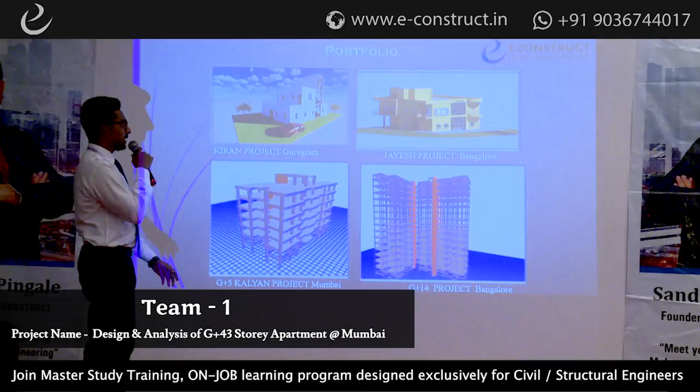We had done some of the projects, as you can see. These are some of the projects done by my team members. There are a couple of structural projects and a couple of residential projects, where you get to see a lot of contemporary things. This is a residential-cum-office building, and this is a yoga center with a residential house. So my team members have worked on various contemporary projects, which gives me immense pleasure to present in front of you.

So coming to the project now. The project that has been given to us is a high-rise project. This is in Bombay, and the clients are Airtel Developers, located in Elias Road, Mumbai. Firstly, as a project manager, I had to sit with the clients and the architects to grab the basic data, which you can see on the slide. We were asked to make G+43, where the client wanted 2 BHK and 3 BHK units.

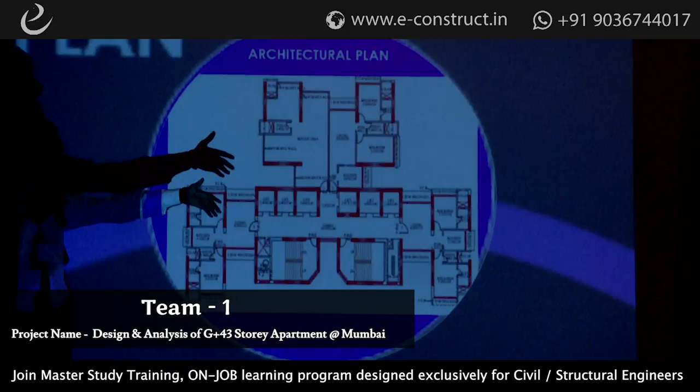So all these disciplines, I'll just state them. The primary thing is the architectural plan. From the architectural plan, you can derive the architectural model. This is the plan, and from that we have come to the model; we have basically used Revit software for this. This is the design model done by our structural team using ETABS, and this is one more elevation model of MEP, which is the other discipline.

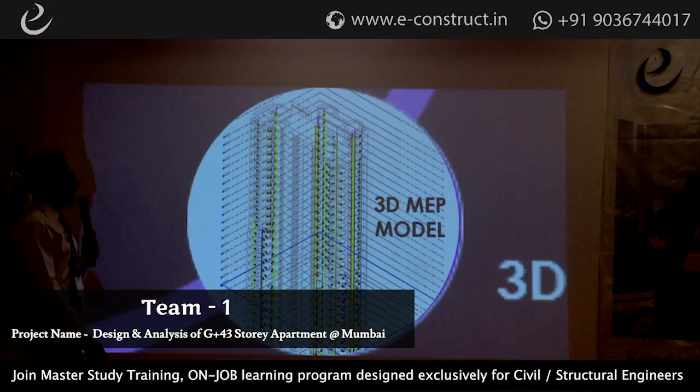For general people who don't know, MEP is mechanical, electrical, plumbing, in which you can collaborate and merge all the elements. If we go in depth of that elevation, you can see two of the typical plans derived from Revit. One is for the plumbing, where you can visualize the plumbing fixtures, like a spout; the blue line is cold water, the red line is hot water, and the green ones are sanitation pipes.

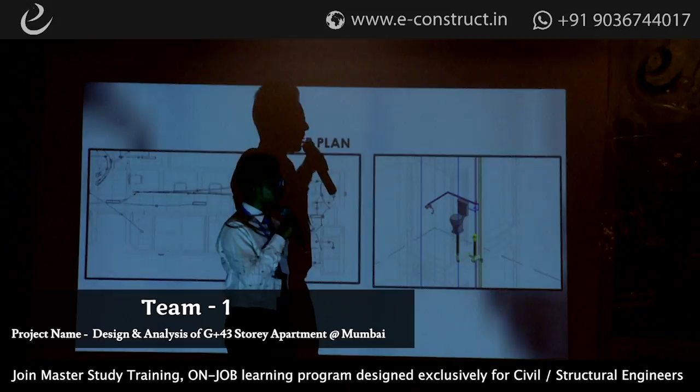So this is how you can virtually see where your lines are going, where your fixtures are placed, and at what height. This will avoid discrepancies for skilled laborers. Let's say a plumber is working and wants to place a pipe, and there isn't a core cutting hole for him to take the pipe out. In such cases, these things can be resolved by pre-planning in Revit.

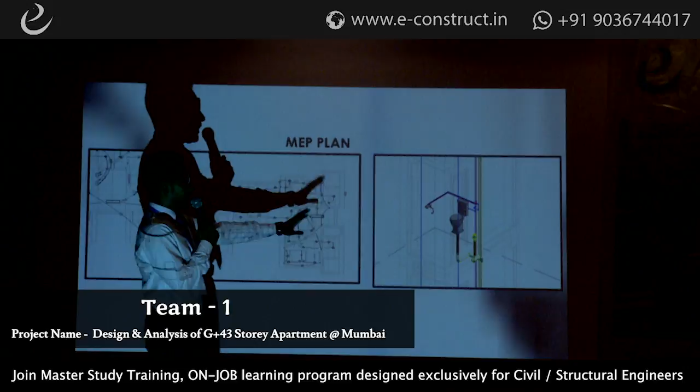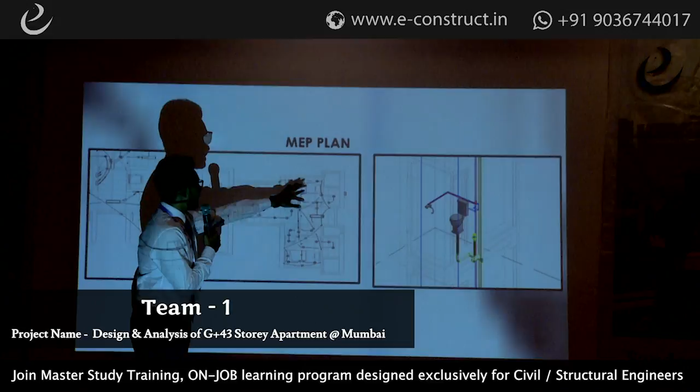And this one is an electrical drawing of a typical house. This is a 3 BHK flat where you can see all the connections and the panels that we have connected. These are the tube lights for the kitchen, and these are normal false ceiling fixtures. This is one typical electrical plan. Similarly, we can do a lot of things in Revit for BIM technology.

One more thing we can do is scheduling. When you go to the execution stage, it becomes a problem for site engineers or quantity surveyors, and there is a lot of time drain and energy loss. BIM will do it for you by making the schedules and quantity takeoffs.

And this is Navisworks, which can be used for clash detection and timeliner. It will virtually show us where the clashes are when you club different disciplines, and you can see the clashes we have resolved, and formulate them with proper documentation in Navisworks, which is again BIM technology. Once they are done, you can also do a timeliner in Navisworks, which gives you a clear picture of how and on what date things will go.

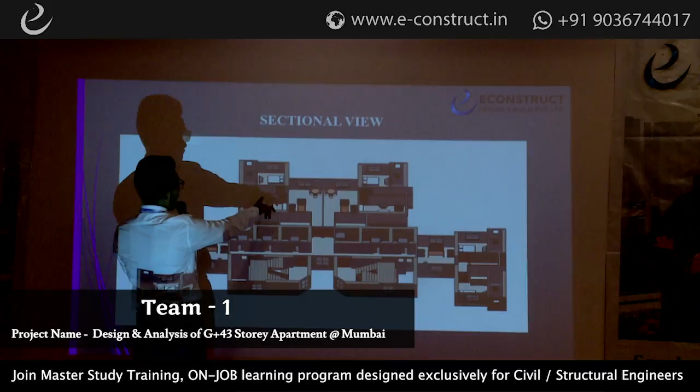So these are the things that you can do. So coming to the project, using all these resources, we have done the model, and you can see this is a typical floor plan where we have cut the section, and the top ones that you are seeing are 2 BHKs, and the center portion that you can see is the staircase, and there are lifts. You might think why there are so many lifts for just 4 units of houses.

Since this is a G+43 and occupancy is more, we have made the calculations and come to a conclusion that we would need 6 lifts, so that it will lessen the discrepancies and disputes of the inhabitants or the end user. And this is a typical floor which has 4 2 BHK units. So this is how you can formulate and document all the quantities using Revit. And the final data I'll be giving you at the end of the presentation.

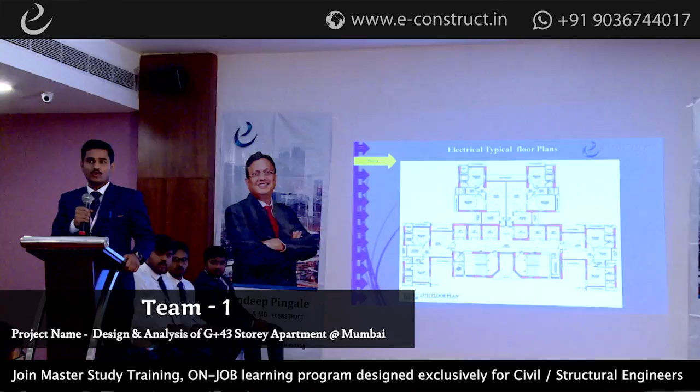My work starts from drafting the center line plan. Then we draft the structural framing plan, then the superimposed plan with help from our ETABS modeler, Mr. Hemant Bagre. After that, we draft 2D plumbing and 2D electrical drawings with assistance from our BIM modeler, Anil Prakash. After completing all the analysis and design, we started the AutoCAD detailing with assistance from our senior structural engineer, Nitin Sabu.

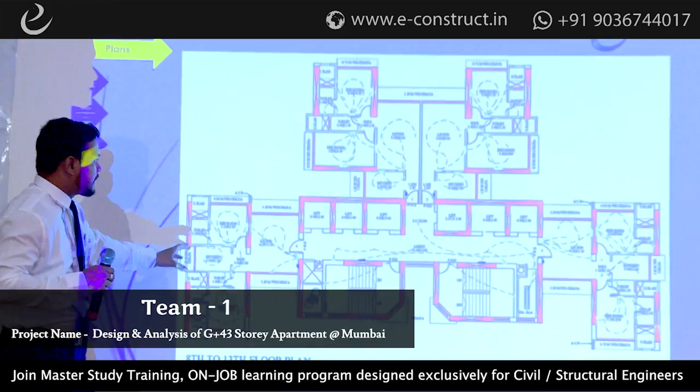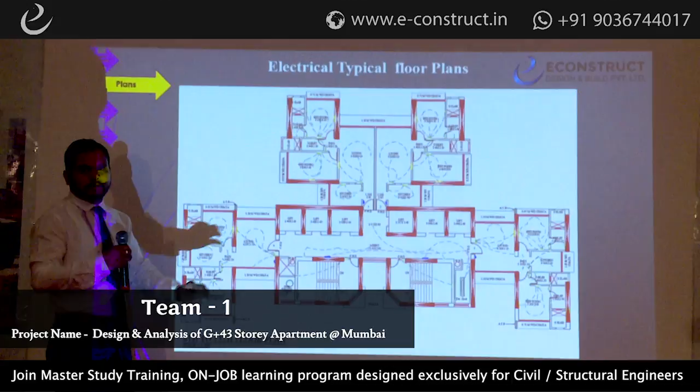Now I will be explaining about the electrical typical plan. So we have almost 3 typical plans. This is our 2 BHK and this is our 2 BHK. So we have given one switchboard in every room, and if MCB is there in every apartment, we will be getting one MCB, and in the main hall or a lobby part, we will be getting an MCB for all the connections for the heavy appliances.

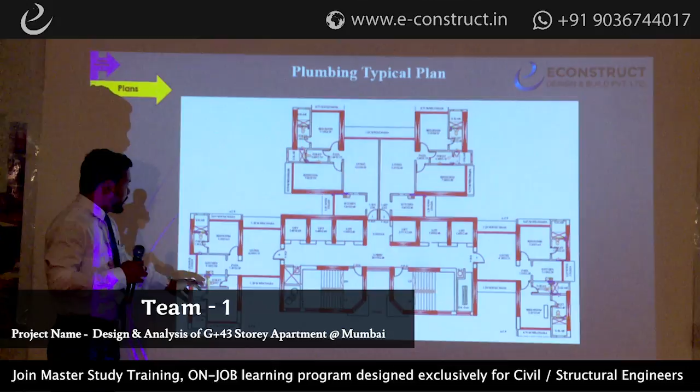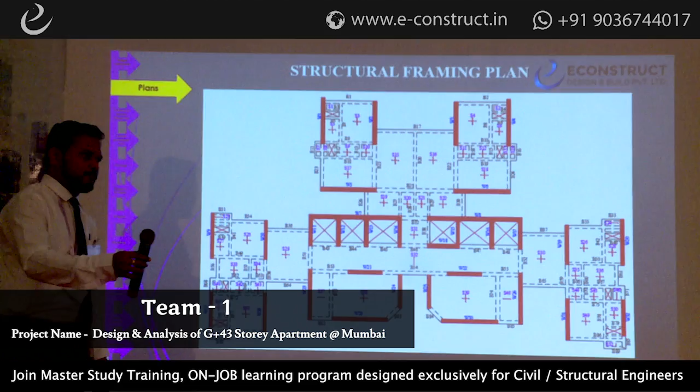As I am an ETABS modeler in this Elite project, I would like to explain about the structural framing plans, superimposed plan, mathematical models and the beam releases given in this project. As per instruction given by our structural team and by reference of the architecture drawing, we have prepared this structural framing plan. If you see carefully in this structural framing plan, the discontinuous line shows the placing and the positions of the beam.

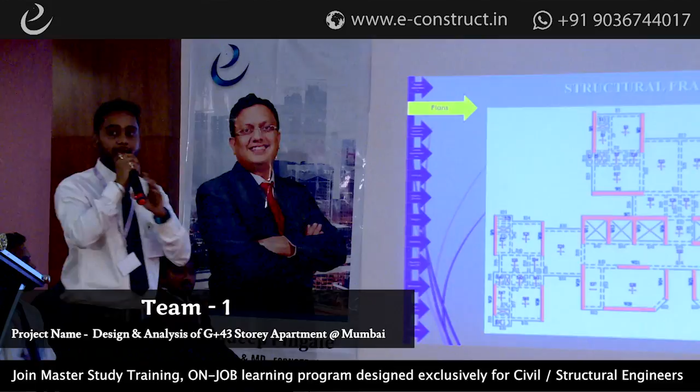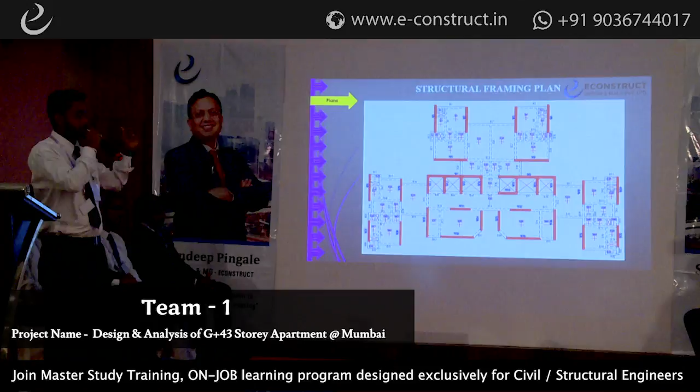As an ETABS modeler, we are focused on the placement, and the offsets coming from the beams in the room by the priorities. We are trying to adjust all these offsets inside the room considering the priorities. For maintaining aesthetic views, we are keeping all these beams inside the wall. As we are considering 4.5 inches wall, obviously offsets are coming. So when we merge the architecture and structure plans, a new plan comes up, that is the superimposed plan.

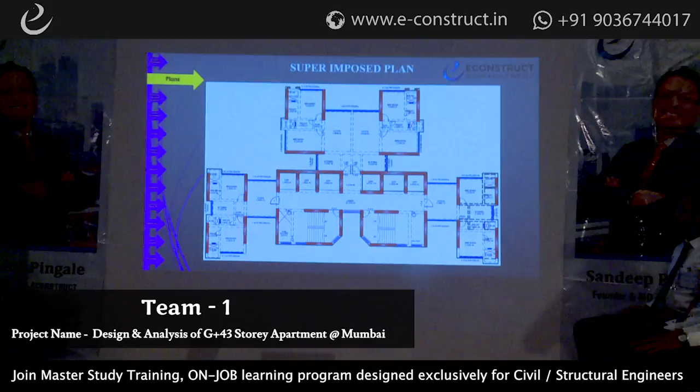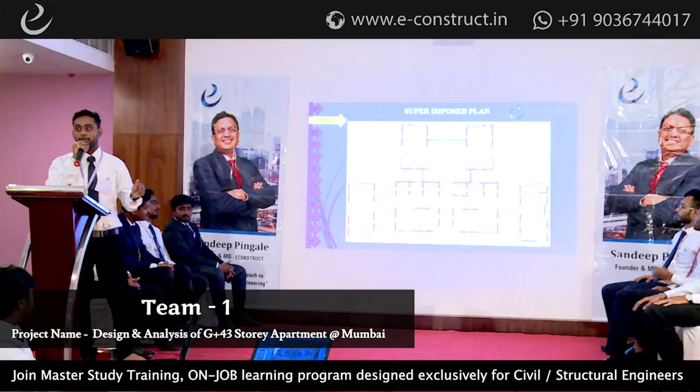Next slide. The superimposed plans give us a clear idea about the position of the beams with respect to the shear walls. In this superimposed plan, you can easily see all the placement and the position of the beams, and I'm sure that there is no offset inside this particular plan. After that, we have prepared the center line plan with the help of beam center lines. These center line plans help to prepare the 3D models in ETABS. After importing into ETABS, we prepared the entire 3D model.

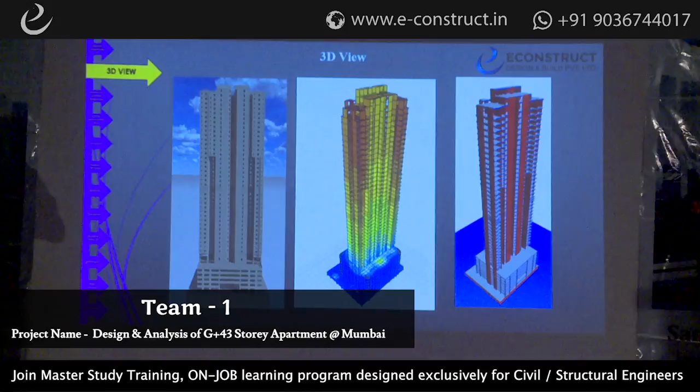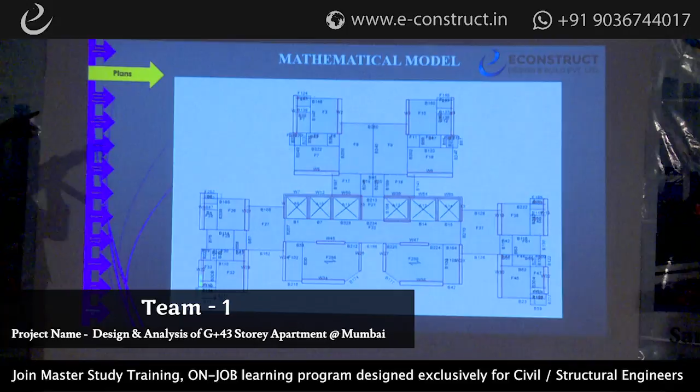We made sure that every element of this entire structure is connected properly to each other. This is the 3D view of our structure and the model. Next slide. This is the mathematical model of the entire structure. The blue lines show the beams, this is the shear walls, and these are the beam releases given by us as per the instructions of our structural team.

After that, we assigned the nominal sizes of the beams and the shear walls in this project. We are taking rebar of HYSD 415 and HYSD 500. The grade of concrete is M35 and M40. As this project is located near Mumbai, there is no issue for the grade of concrete, and we use lightweight blocks for the non-structural walls. The section properties we have considered are beam sizes of 300 mm by 600 mm of M35 grade of concrete, 230 by 500 of M35, and 150 by 300 of M35.

These beams are used for the service slab, and we are considering columns of 500 mm by 500 mm of M40 grade of concrete. After that, we assigned the wall sections: two shear wall sections, 300 mm thick and 500 mm thick, of M40 grade of concrete. We assigned the various slabs like general, parking, staircase, OHT and LMR. We have assigned 150 mm thick M35 slabs, and the remaining slabs are 200 mm thick of M35 grade of concrete. We also assigned all the area loads, considering the various area loads.

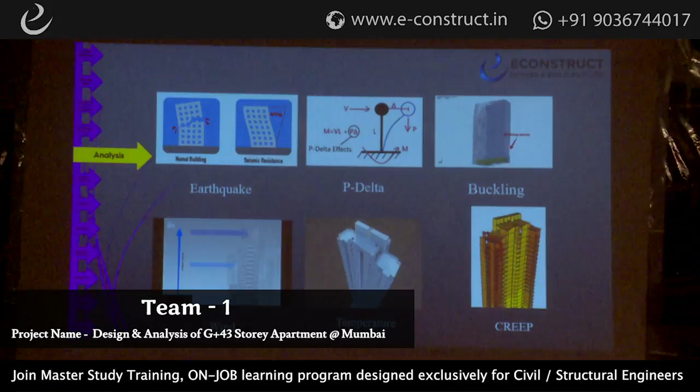In P-delta analysis, why have we done that? Because of the self weight of the building, as it is G+43, its self weight will be huge, and due to that and the lateral force which will be coming, there will be an extra bending moment which will try to fail the building. It should not happen, so we have taken care of that by P-delta analysis.

And due to the self weight of the building, there are compression forces coming on the columns and shear walls. So the columns and shear walls should not fail. That is why we have done the buckling analysis.

And in wind analysis, as it is a G+43 structure, the wind will be governing at the top of the building. So it should not fail in stability checks. Means due to wind, the stability of the building should not fail. So we have done the wind analysis.

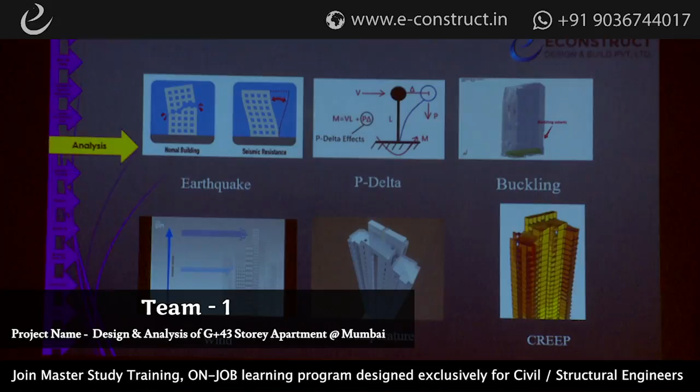In temperature analysis, due to the temperature, there will be extra stresses on the building, majorly on the terrace and the outermost elements of the building. And due to those stresses, the members should not fail. That is why we have done the temperature analysis. And in creep analysis, we have checked that if there is a load for a maximum number of years, like in the lifespan of the building, our building should sustain that deflection. So we have done the creep analysis.

So this is the seismic base shear analysis, which is earthquake analysis. Base shear means the lateral force coming at the base of the building due to earthquake. We have calculated the static base shear, which is VB, and it is calculated by Ah into W. Ah is the horizontal acceleration and W is the self weight of the building. Horizontal acceleration is calculated by Z/2 into Sa/g into I/R, and Z is the seismic zone.

As our building is located in Mumbai, we have taken zone 3 and zone factor as 0.16. As in our building the population is more than 200, we have taken importance factor as 1.2, and we have taken response factor as 4 because we have designed the shear wall as ductile shear wall and RC frames as ordinary frames. And at site, near our basement substructure, there was hard rock, so we have taken site type as 1.

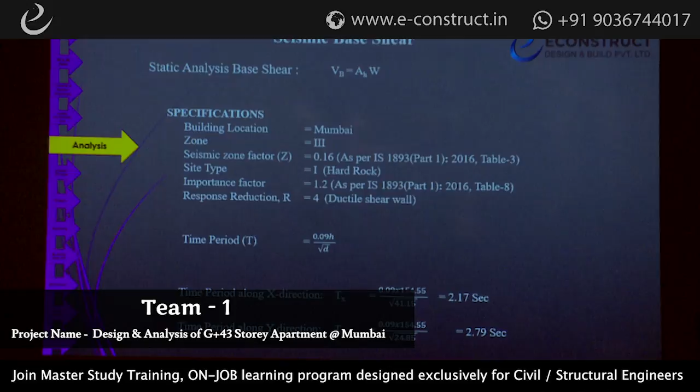As per IS 1893 Part 1 2016, the time period we have taken is 0.09H upon root D because infill walls are present in our structure. Here H is the total height of the building and D is the lateral dimension in x and y direction at plinth level. So time period in x direction is 2.17 seconds and time period in y direction is 2.79 seconds.

We have scaled it, and we have cracked the model in service and strength, as we are considering that in the lifespan of the building, the concrete will be effective only some percent, it will not act fully. So we have cracked it, and we have scaled the dynamic base shear to static base shear.

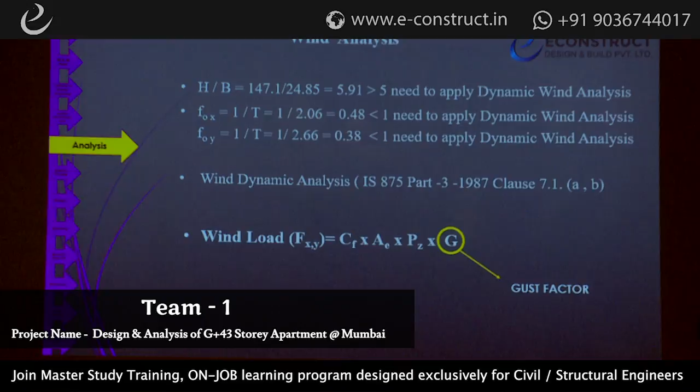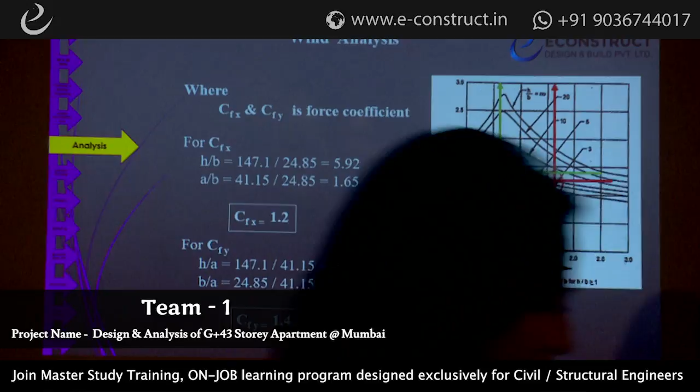In this, the force coefficient in x and y direction depends on the h by b ratio. H is the height from plinth level to the top terrace level, and h by b is 5.92. B is the least lateral dimension of the building, and a by b is 1.65, and the force coefficient is 1.2, and for CFy it is 1.4. Next.

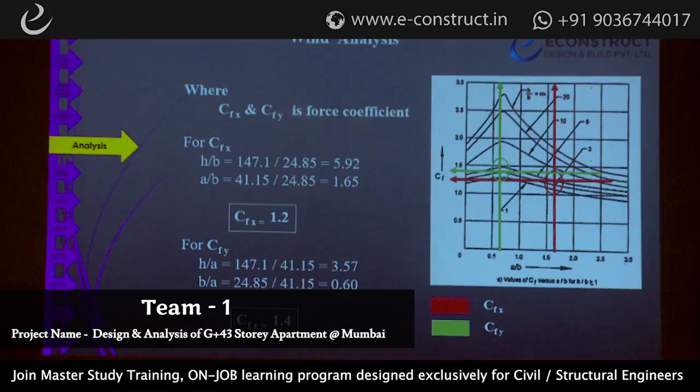Effective frontal area is the area in which the force will be half of the above story and half of the below story. So we have calculated for all the stories, and we have found that the critical one is for the top stories. So in x direction and y direction it is 101.26 and 167.69 square meters.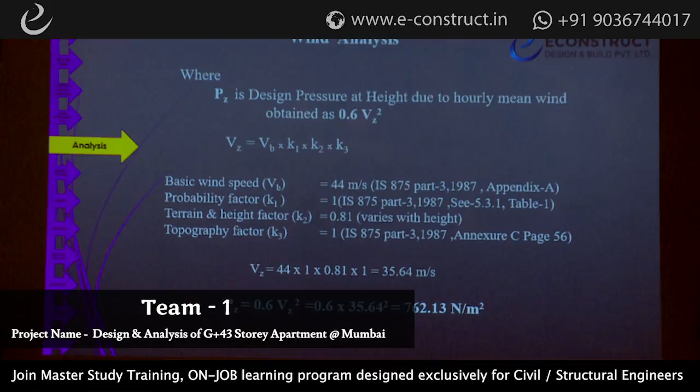Pz is the design pressure at any height, and we can calculate it by 0.6 Vz square. Vz is the design wind speed, which will act due to Vb, K1, K2 and K3, that is basic wind speed, probability factor, terrain and height factor, and topography factor. So we have got the design pressure as 762.13 newton per meter square.

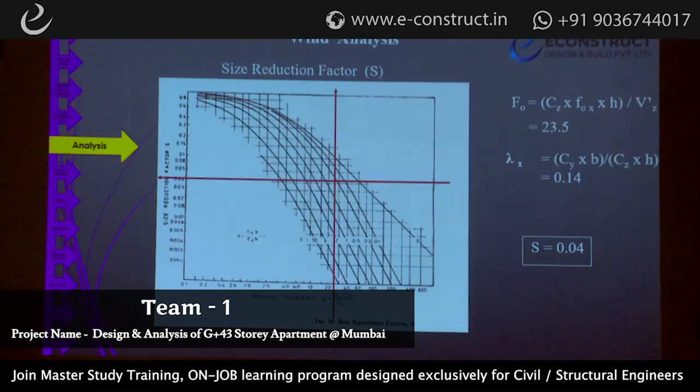Next, G is the gust factor. We have calculated it from the graph, that is GFR and L(h) value. We have got that. Next, background factor, we have got it from this graph by calculating that formula. Next, size reduction factor, we have got 0.04 by calculating that lambda x formula from this graph. Next, gust energy factor, we have got 0.06 by calculating that formula from the graph.

This is the gust factor. We have got 1.95. And wind load in x and y direction is 180.59 and 375.74. As I have told you, we have got this critical one at the top story. And wind base shear is 13,020 kilonewton, and in y direction it is 6,216.33 kilonewton.

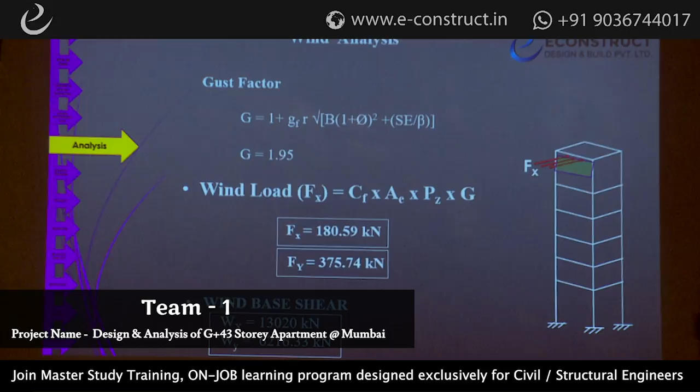Next, modal participating mass ratio will be explained by Sairam Mudumba. I would like to call him. Thank you.

Thank you, Urmit. I would like to give a brief review about my project. First of all, when we took this project into our hands, we analyzed what resources we have, how we can divide the team, and how we can work efficiently. Then we divided the team into some departments: AutoCAD, structural and structural assisting team, the site location team, and all those things. After all these explanations and ETABS modeling and stability checks, now we have to analyze the model. After analysis, we will get some results, so we are going to look into those results right now.

First of all, we have to check the modal mass participation. We have to know what modal mass participation is. We all have smartphones, right? Say yes or no? Yes. We all have smartphones. There is a snapshot option. If we click the capture button continuously, every snap will capture for certain seconds, right?

So if someone is throwing a ball like this, and we hold the phone like this and hold the capture button, the phone will record every movement of the person. So you can see how he is rotating, how he is throwing the ball every second. So that is the modal mass participation in our structural case. We are going to see the model, how it is behaving while a seismic earthquake event is happening.

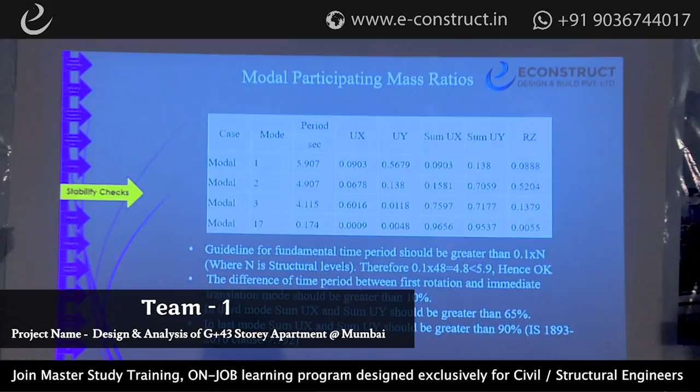So those are the modes we have considered, total 17 modes according to the damping ratio, and those are the time periods and the rotation values. You can check all the values on the table, and guidelines for the modal mass participation. For everything we need a reference, right? What we are doing, why we are doing that. So we have to go through the reference.

So those are the references we took from the Indian Standard Codes. The Indian Standard Codes say that in the previous code there is one thumb rule: the first mode time period should be 0.1 into n. N is nothing but the number of structural levels, how high our building is. So according to that, the first mode time period should happen.

First of all, what is the time period? Time period is the period taken by the structure to complete one first oscillation. So that is the first mode time period, and that should be under control. In our case, according to the thumb rule, it has to be 4.8, but in our case it is 5.9. A little higher means our structure is a little flexible, so we can say that it is safe. Why? Because the structure should be ductile. It has to participate when an earthquake is coming.

Can I generalize this? I can generalize this with one example. If you have a dog with a tight belt and you are holding it tightly in your hand, the dog is trying to move forward with maximum energy. Here we can observe two cases. You are holding the belt very tightly, but your dog is moving forward with high energy. What will happen? The dog will die with that belt, right? In the second case, you are holding it very loose. It will escape from you. Everything is damaged for us, right?

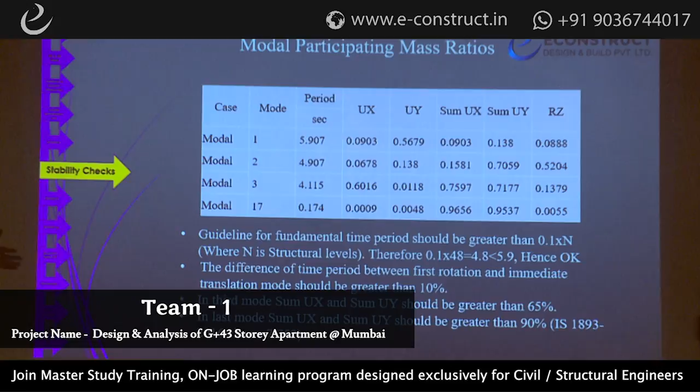What are interstory drifts? According to IS standard, it has to be 0.004 in both directions. It is safe. And coming to the displacement, which we just discussed. Due to the lateral forces, the building is going to displace with a certain time period. We can relate this to modal mass participation. So displacement is under control, so our building is safe. We are providing correct ductility to our building. We can conclude from here and relate this to the modal mass participation again.

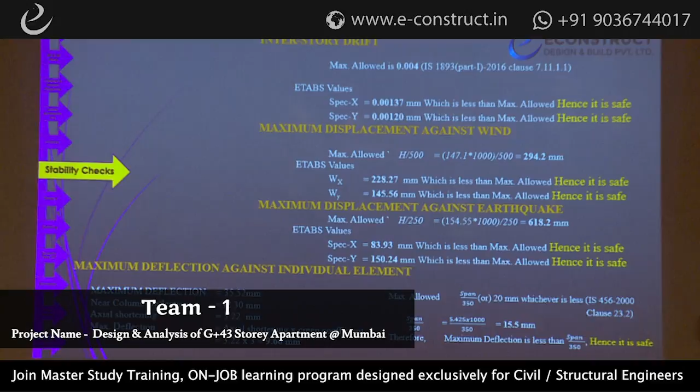And coming to the deflection. Deflection is also safe in our case. Just now we showed the gravity deflection and lateral deflection images, how our building is going to deflect. And these are the values and proofs that the deflection is under control.

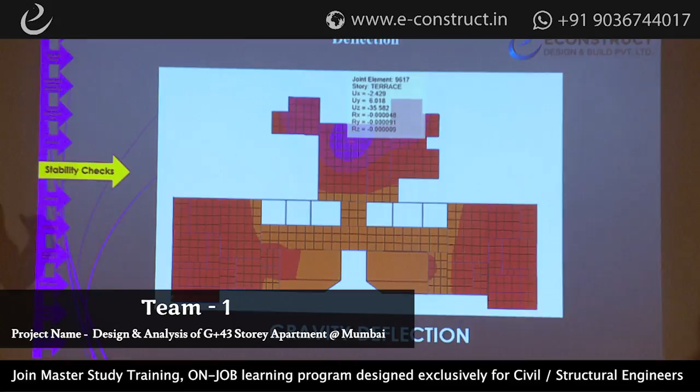And coming to the torsion, we can simplify that torsion is nothing but rotation. Everybody knows about center of mass and center of rigidity, and the asymmetry in the building. Can you go to the plan once? Yeah, this is our building. If we cut the section like this, it is unsymmetric. If we cut the section like this, the building is symmetric. Due to the unsymmetry in one direction, the center of mass and center of rigidity are at two different places. So somebody is hitting you at one place and your reaction is from the other place. So rotation will happen in the structure, right? That is called torsion in our case.

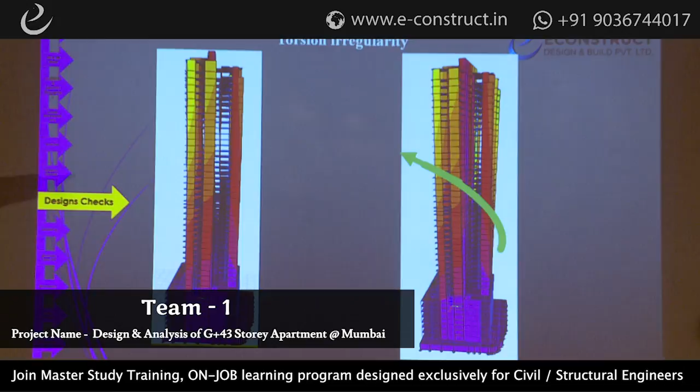So this is the torsion. You can observe it clearly in this shape. This is the elevation of the building. After torsion, that will be the structure elevation. And we are going to take care of the torsion also. And this is the soft story. Soft story means weakness in the stiffness. We have service floors and refuge floors with lesser height than typical floors. So there is a chance of less stiffness than the floor above, right? That's why a soft story will happen. What is a soft story?

So soft story means if I am standing like this, one of my legs is a little weak. So if somebody hits me, I will fall down easily. Otherwise, if I am very healthy and very stable and somebody hits me with the same force, I will resist up to some point. So that will be the soft story. In our service floor, we have 21 stories, and the service floor at the 6th level is the soft story, and we are designing our structure for that soft story effect also.

You can see that is the soft story. Bottom story stiffness will be less than 70% of the upper story. Those are the criteria of soft story. We are taking care of the soft story also in this structure. And these are the frame designs. After analysis, what is the next step? Design of the structure, preliminary design of the structure. So, with the inputs of all analysis details, we confirmed that our building is stable. So after that, we planned to design the structure.

These are the criteria: preliminary design results and final design results we used after so many iterations like soil structure interaction, foundation design, all those things. All our frames are passing. So we provided very economical and optimized structures in this project to reduce the project cost. We are not using heavy structures that increase the dead load of the structure. We are using proper section sizes. We can make sure of that.

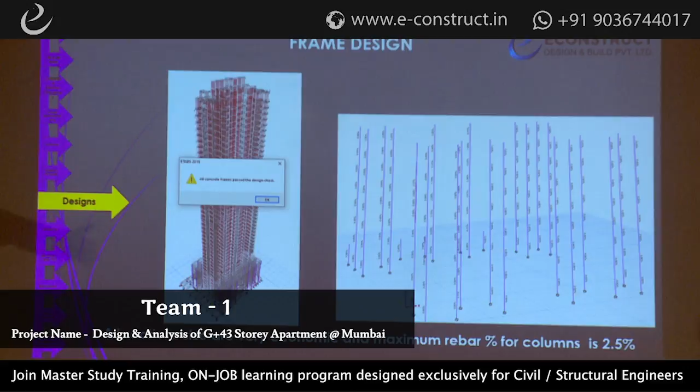To compensate, concrete is good in compression. Steel is good in both compression and tension. So we are using rebar to increase the tensile strength. So we don't need to increase up to 5% or 6%. We can optimize this by compensating the strength with concrete. So we used this technique and limited the maximum rebar percentage in the column to 2.5% only. In this steel case also, our structure is very economical.

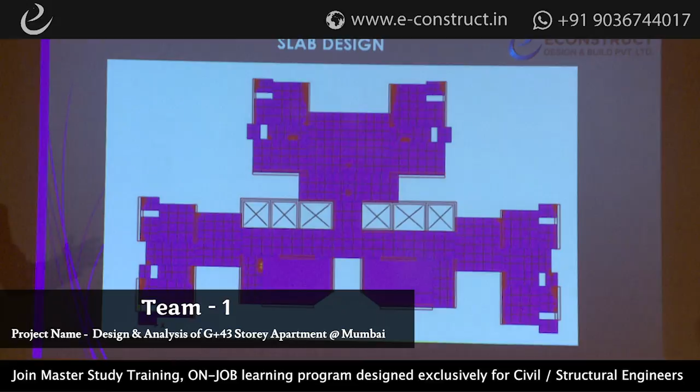And these are the shear wall designs we did in this project. You can observe the lateral reinforcement, longitudinal reinforcement, and shear reinforcement we got. We designed and detailed according to these reinforcement values given by the software ETABS. And this is the slab design we did in ETABS, which is provided as 10 mm rods at 200 center to center. And these are the foundation details. Coming to foundation details, our senior structural engineer, Mr. Nitin Sabu, will explain about the foundation. Thank you.

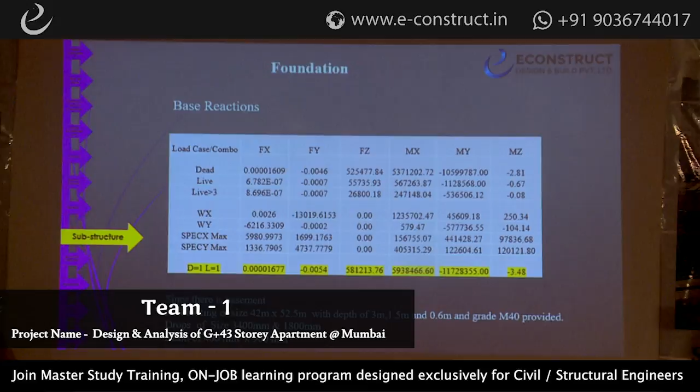From the ETABS model, these are the base reactions that we got after designing the superstructure. In that, dead load and live load are the major governing parameters. Since there was a basement in our structure, we opted for a raft foundation. The size of the raft foundation was approximately 42 meters by 52.5 meters. We varied the depth to reduce the cost, from 3 meters to 1.5 meters and to 0.6 meters. The grade of concrete we used was M40.

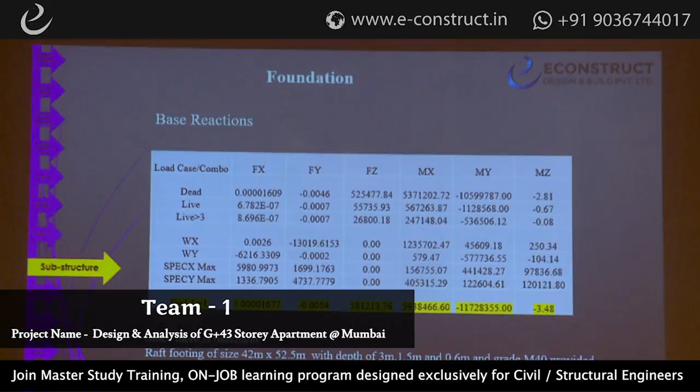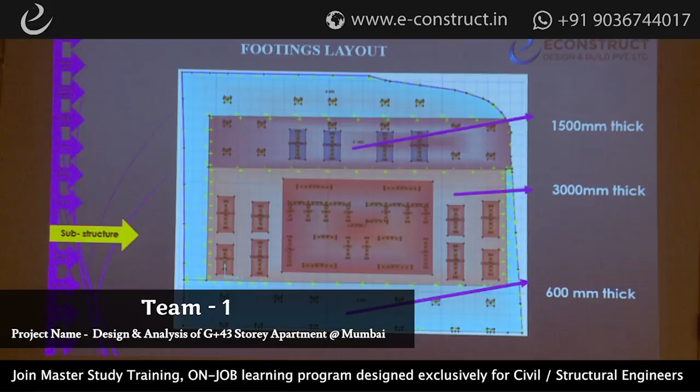We provided drops also, of size 3400 mm and 1800 mm. Since there was a retaining wall surrounding the basement, we could not go beyond that retaining wall, so we provided a beam of size 400 by 900 surrounding the basement. These are the footing layouts. As I told earlier, we decreased the size. Those are 600 mm depth slab foundations. The middle one is 3000 mm thick, and the other one is a 1500 mm thick foundation.

After modeling, we went for foundation checks. The main check was ground bearing pressure. The allowable ground bearing pressure we got from our geotechnical team was 1400 kilonewton per meter square, and the allowable settlement for the raft was 50 mm. For the subgrade modulus, which is mainly the support data, it is given as the safe bearing capacity of soil divided by the allowable settlement.

We calculated it and found it as 28,000 kilonewton per meter square per meter. And the allowable, the maximum soil bearing pressure we got was 660.14 kilonewton per meter square. You might think that this is very uneconomical, but coming to the steel part, I will explain it later. So it was safe in GBP also.

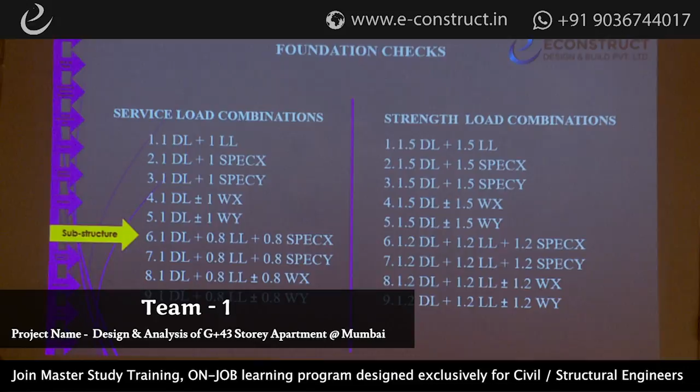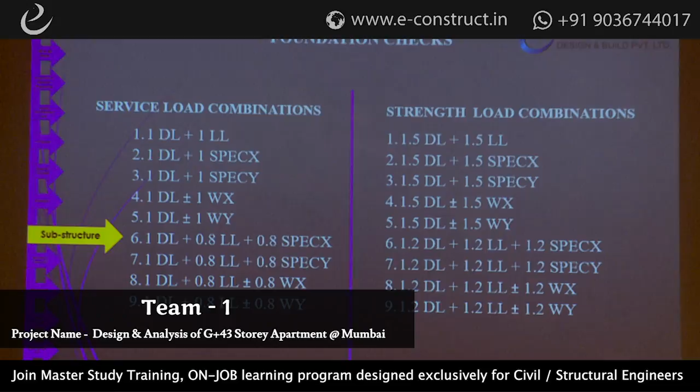Next slide. Coming to the settlement, maximum allowable settlement was 50 mm, but we got only 23.57. Here also you will think that this is uneconomical, but I will explain it later on. Next slide. These are the foundation service load combination and strength load combination used. Service load combination was used to check the punching shear, one-way shear, and for the moment in service envelope for crack width checking. Strength load combination was used to design the structure.

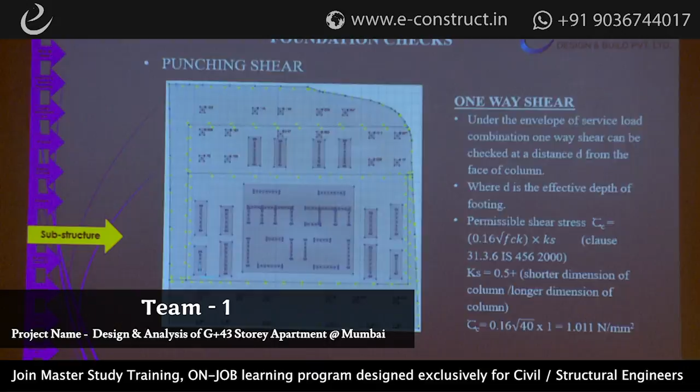For checking the punching shear, we use the default values from CSI SAFE, but for shear wall it won't show the value, so we cross-checked it with the S13 and S23 at a distance of D/2 from the face of the column. For one-way shear also, we checked the S13 and S23 at a distance D from the face of the column. Maximum stress found was 0.98 N/mm² and 0.92 N/mm². The allowable one was 0.16 root fck, which was coming as 1.01, so it was safe.

And coming to the steel part, this was a major challenging part since it was a G+43. The rebar was coming so high, and our requirement in SAFE was 40 mm dia bar at 50 mm spacing. So we could not give that much spacing. So with our mentor's help, we provided 40 mm bar at 150 mm spacing in 3 layers in both X and Y direction. That was the major challenge we were facing.

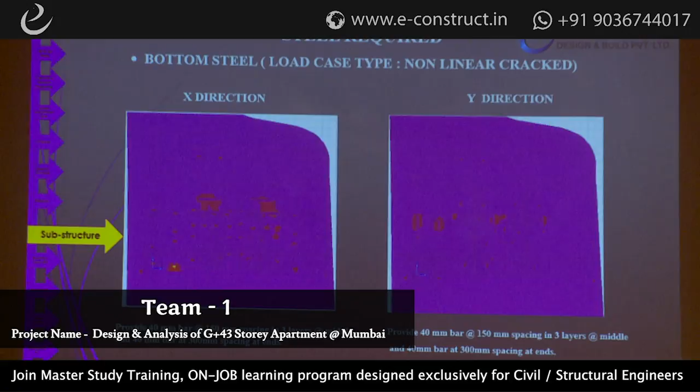And for bottom steel, we used non-linear cracked. We changed the dead load and live load condition from linear to non-linear cracked stage. And for top steel, we changed the load case to non-linear allow uplift case. And the steel coming in X and Y direction was 32 mm dia bar at 125 mm spacing in both X and Y direction.

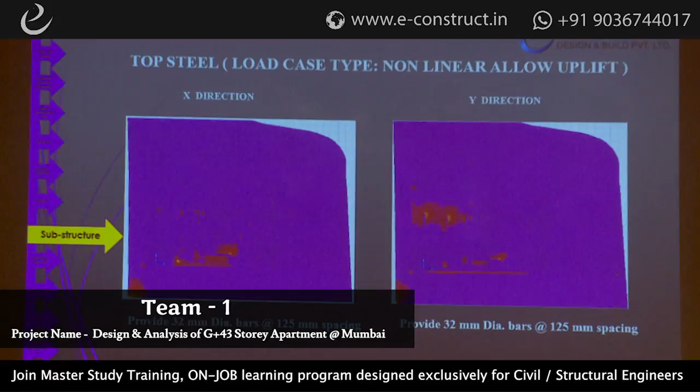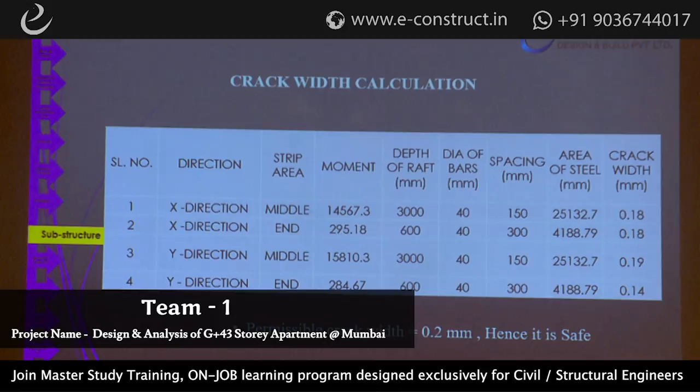Now coming to the crack width, we calculated the moment from the service envelope, the moment in M11, that is X direction, M22 in Y direction, and found the maximum moment. The crack width calculation was done using the Excel sheet, we input the Ast, depth, everything, and found the crack width was 0.18, 0.18, 0.19 and 0.14. The permissible value was 0.2 mm, hence it was safe.

And coming to the soil structure interaction, nowadays when the earthquake comes, the response of not only the superstructure but the combined effect of substructure and superstructure is very much important. That's why we exported the raft back to ETABS and checked how the structure behaves combinedly. This was the percentage of steel before soil structure interaction, that was after, and we verified that all our members passed even after the soil structure interaction.

Thank you all, and I would like to invite Sairam for explaining PBD and the detailing part.

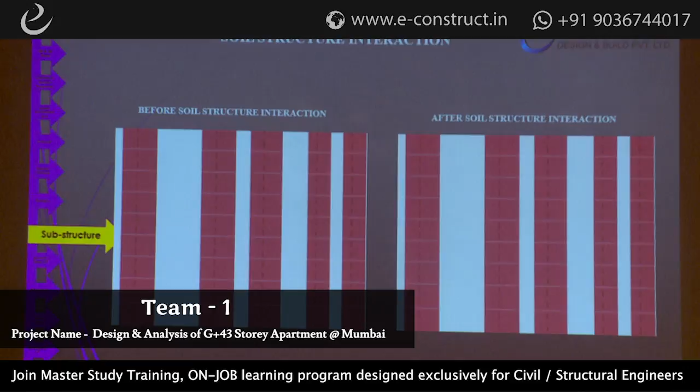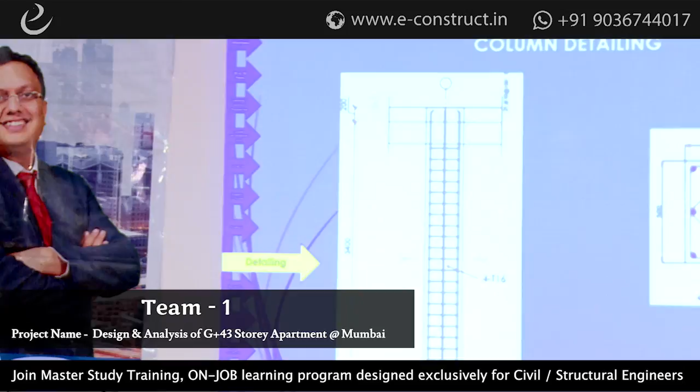This is the column detailing. We provided 4-legged stirrups in 2 manners. That is because the column size is 500 by 500, that much shear reinforcement is required in that column. And coming to the beam and column detailing schedules. For detailing, we use AutoCAD detailer software as of now. So these are the schedules and the bars, the shapes given by the software. And we are going to send these detailed drawings to the site for execution.

And coming to the foundation details, as our senior structural engineer explained, those were the difficulties we faced in the foundation steel detailing and designing, and just because of that, we provided 3 layers of steel of 40 dia in 3 layers with 150 center to center.

According to IS 456, it is very difficult to place the 40 dia bar in 50 mm spacing. Why? Because everyone knows that segregation will happen, mesh action will form, aggregate will go somewhere else, and the concrete mix will come. To solve those difficulties, we arranged this layer.

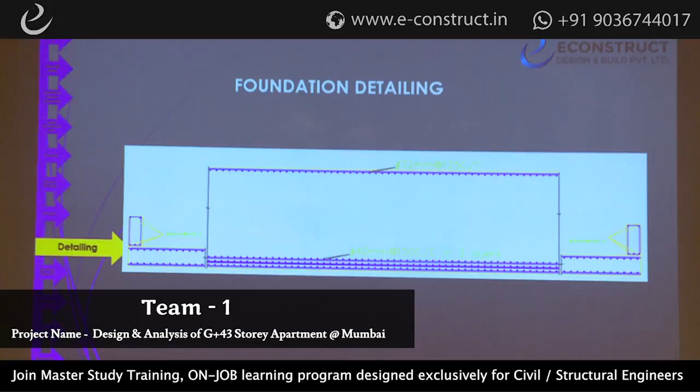And coming to the performance based design, this is the new topic according to ASCE 41. We did performance based design for our structure. What is performance based design? Everyone purchases mobiles, laptops, everything by spending some money. When we are spending some money, we expect that much performance from the equipment we are going to purchase.

So many Realme mobiles got blasted. Redmi Note 4, I think so. After that, they also started this performance section. They are announcing that their mobiles perform this much, no more mobiles will blast. So just for a small mobile or a laptop, they are doing performance based design.

Why not do performance based design for our G+43 structure? Why can't we show our building is performing well? We are designing the building, we are analyzing the building, a very confident team and a confident structure. Why are we not showing that our structure performs well under earthquake or wind effects? So we decided to do the performance based design for our building, and now we are showing the performance based design.

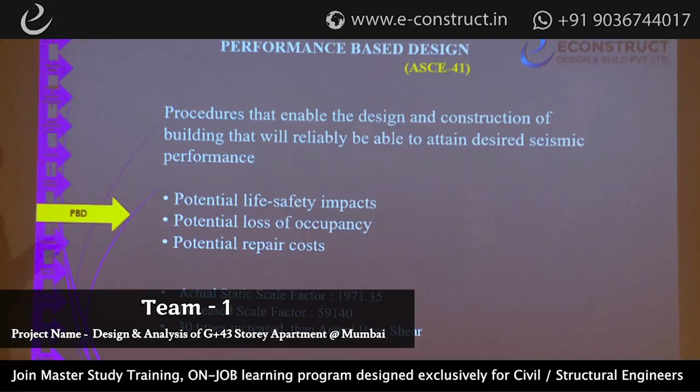This is the process of performance-based design. First, we have to select the performance objectives, how our building should perform. These performance objectives depend on the client requirement. Why? Because he is paying money for the structure, right? So we have to design the structure according to the client's perspective, how he wants his building. If he wants his building to perform very well in the earthquake and to occupy the building immediately without any damage, we can do that.

And there is life safety: the building will lose strength, but there is no damage to human life. We can design for that also. And collapse prevention: the building will lose a lot of strength, and the client has to be ready to accept severe damage. Those are the performance objectives. Design engineers can sit with the clients and discuss the economy, how much it will cost, and what performance he wants.

After that, perform preliminary design. Designers will go for preliminary design of the structure, and they will analyze whether the preliminary design is suitable for that requirement or not. If yes, they will go for construction. If no, they will go for preliminary design again, make some modifications, and come back to the capability test. That is what happens in performance based design.

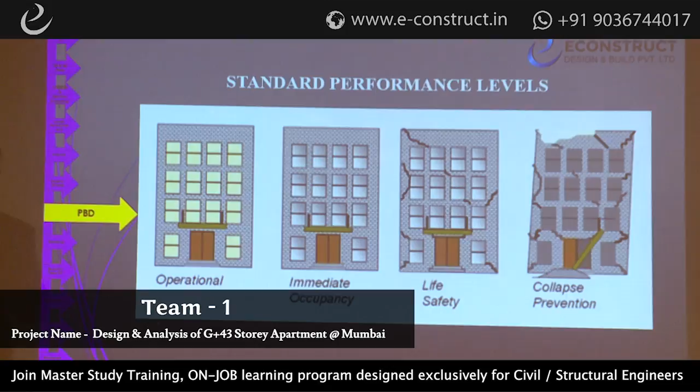We are increasing the effect by X percentage on the structure: the earthquake effect. For example, one earthquake is hitting with some force, and we are increasing that force to some extent. In this project, we increased that to 30 times and checked. We will see the results later.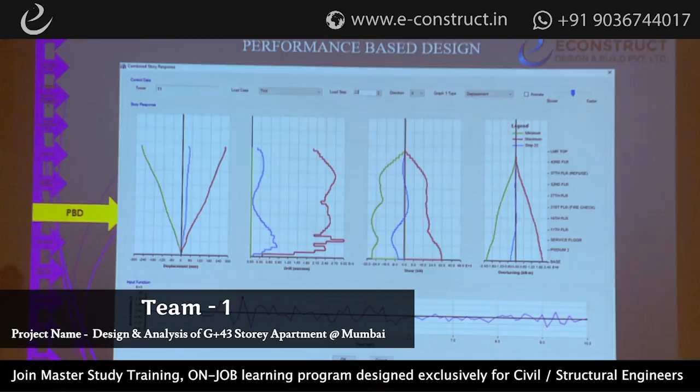And this is the dashboard. We can see that we use time history analysis to do this performance-based design, and this is the base shear of the time history analysis. And this is the major part. We can rate our structure from here onwards. We just discussed life safety, immediate occupancy, collapse prevention performance. So what are those? We already explained.

In immediate occupancy, little non-structural damage will happen, like false ceiling patches and plastering patches will fall down. There is no need of repairing either. They can occupy immediately after the earthquake. In life safety, the structure will lose some strength to a small extent, but still it's safe. No emergency repair will be required.

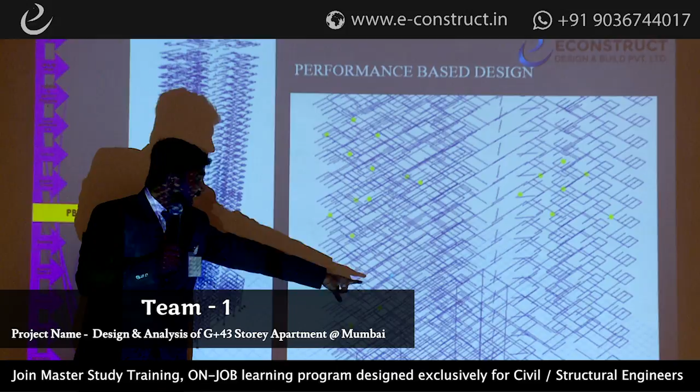So in that case, we can see in the bottom bar that green color is immediate occupancy, and after that blue color is life safety. In our structure, while doing performance-based design, we are proudly announcing that we got immediate occupancy hinges at some places, and life safety hinges only at 2 places. You can see the blue colored dots representing life safety hinges, and the green colored dots are the immediate occupancy hinges.

With reference to this, we can go to the next slide. The US Resiliency Council rates buildings according to these norms. According to our previous slide, our building will be rated as 5-star in US Resiliency.

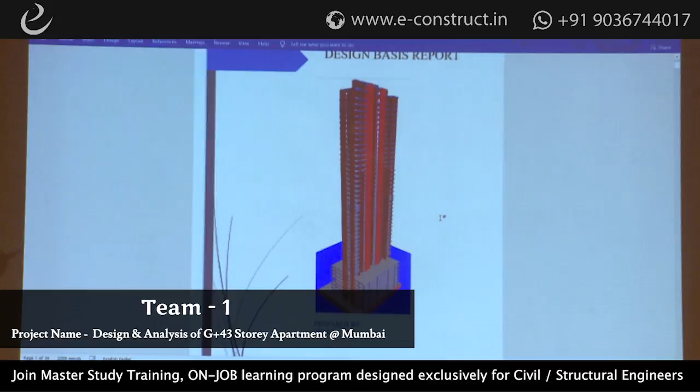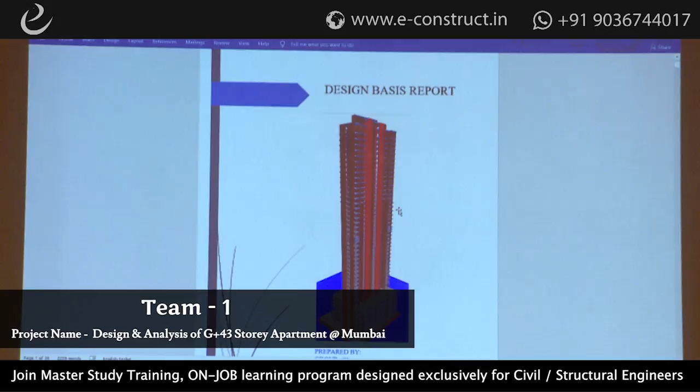Coming to this project, this is the overview of our project, and now we want to show some documents to you regarding this project. First, we will go through the design basis report of this structure. This is the design basis report we are going to submit to the client or owner of the structure. Whatever we discussed over the last 1 hour, we mention each and everything in detail: how load calculation will happen with the calculation formulas, what loads we considered on the structure, what material he has to use, and what the considerations, design parameters and factors are. You can go through the DBR.

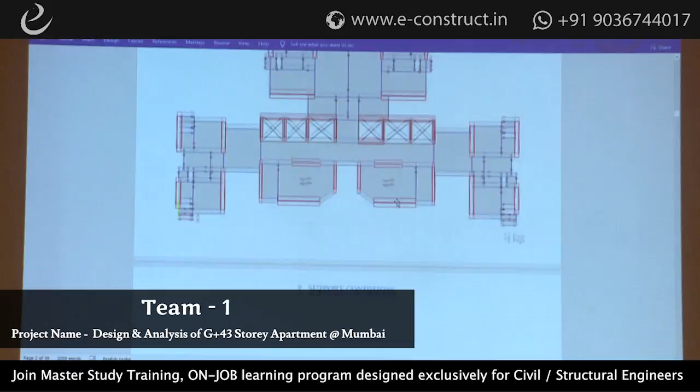And we are mentioning each and everything: superstructure, centerline plan, mathematical model, how we give beam releases, what the support conditions are, what section sizes we provide. We can see the load calculations, for how many people we considered water requirement, for how many days. He can know all those things from this DBR and provide accordingly. And these are the stability checks we discussed just now.

And from here onwards, foundation design will start: what foundation checks we did, and how it will be. Is it safe or not? We are going to convince the client our structure is safe. We are protected. So this is the report we are going to submit.

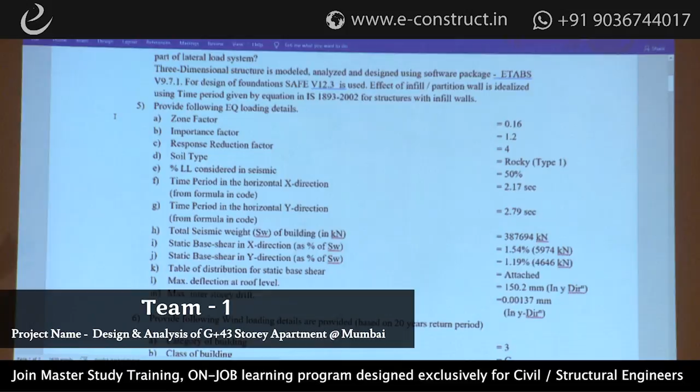And then onwards, for such a high-rise building, we have to get an NOC from the high-rise committee. Now we are going to see the high-rise committee form. We have to fill each and every detail about the design parameters in this form and submit it to the people in the high-rise committee. Only then, if everything is okay, they approve our building to construct. That will happen with this high-rise committee form.

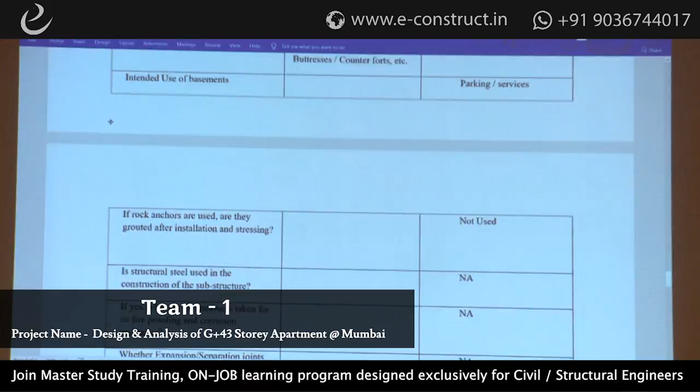We fill each and every design detail in this. You can see the modal mass participation, where the cantilever is coming, how much cantilever length is coming, what the loads are, how much deflection is happening in the building, how it is displacing, what the drifts are. Every design parameter we are going to mention, and what the materials are.

Next we are going to see the wind tunnel analysis. Actually in this project we assigned wind gust dynamic analysis, but after this we are planning to do the wind tunnel analysis also to check the performance in this analysis also. In this wind tunnel they will create our model according to the environmental cases, and they will apply the actual forces artificially in their lab. We did it with RWDI. And they will assign actual forces in this laboratory, and they will check how the building will deflect with those forces with all the environment parameters.

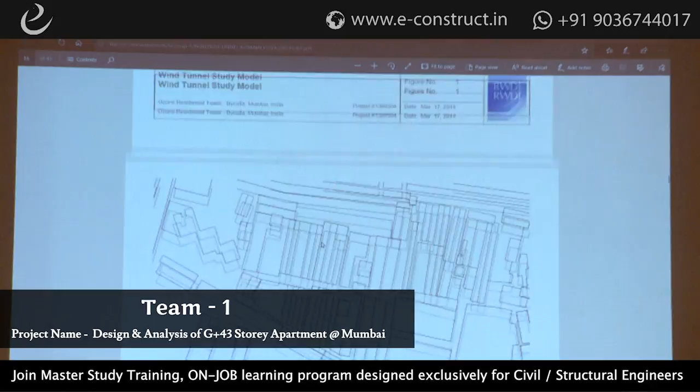And these are the moment graphs and force graphs they analyze after. They will mention where we are getting high frequencies, where we are getting high forces, where we have to take care about the structure according to the wind and all those things. This is the high frequency force balance they are going to use in the wind tunnel analysis. And they will give some suggestions according to our building also.

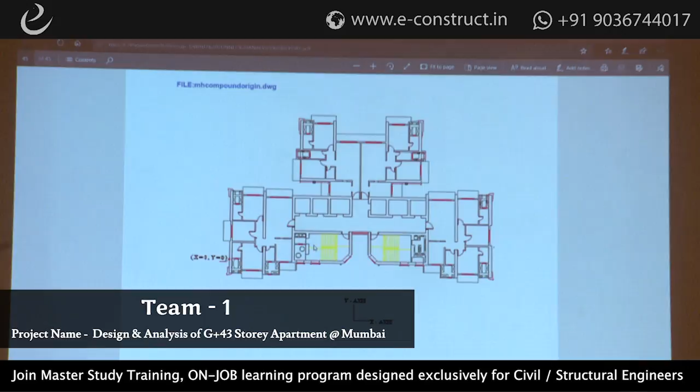And this is our final layout. We are going to plan this wind tunnel analysis, and we are going to design our building to this wind tunnel analysis also. And next we have some BOQs and rate analysis part.

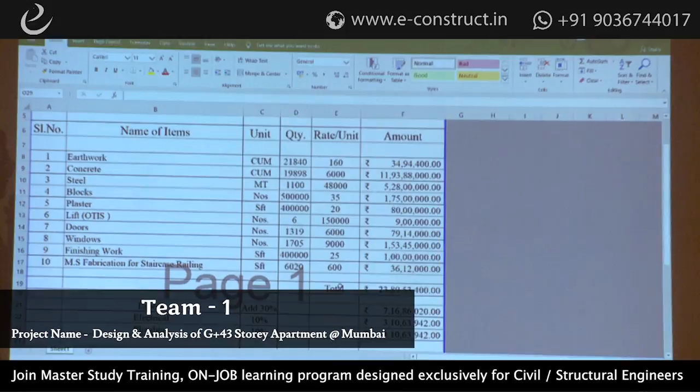Hello again. So I'm sure this is the most interesting part from the perspective of the client. As you can see, the quantities that we have generalized, since this is not in detail. You can see the basic quantities for the earthwork. The main things we have notified, and this goes like this, like the concrete that would be required for the project. And since the building is very humongous, the numbers are very huge here, which a common man may find exaggerated.

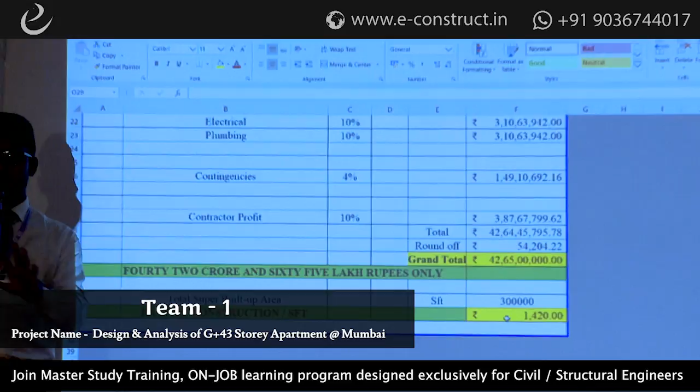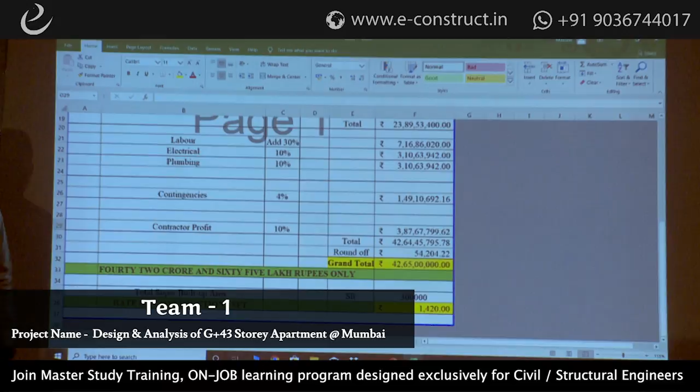So after getting all the quantities, we have made a rate analysis of the basic materials. But I would like to add one more point: the rates that we have taken are just the basic rates, and they would change based on the location. If it is Karnataka, it would go on KPWD, and if it is Maharashtra, it would go on the Maharashtra State Board's PWD. This is the basic cost of the building, and you can add the charges based on the State Board's PWD. So that's it. So this would be the entire cost of the building. Thank you.

That too with just 2 weeks and with just 8 to 10 people, right? So, just a few questions actually as a formality. What was the base shear of the earthquake and the wind? Anybody? Yeah, it's 7,000. For earthquake? Yes, sir. 5,974 for the earthquake base shear, and 13,020 kilonewtons is the wind base shear. So it's a wind governing structure?

Another thing is, what was the difference between the center of mass and center of stiffness? Center of mass can change anywhere. Why? Because I'm talking about the x and y distance between the center of mass and center of stiffness. We got 4.21 meters around. Okay, so 4 meters, and that too in the first mode you were able to reduce the torsion. So that's really wonderful.